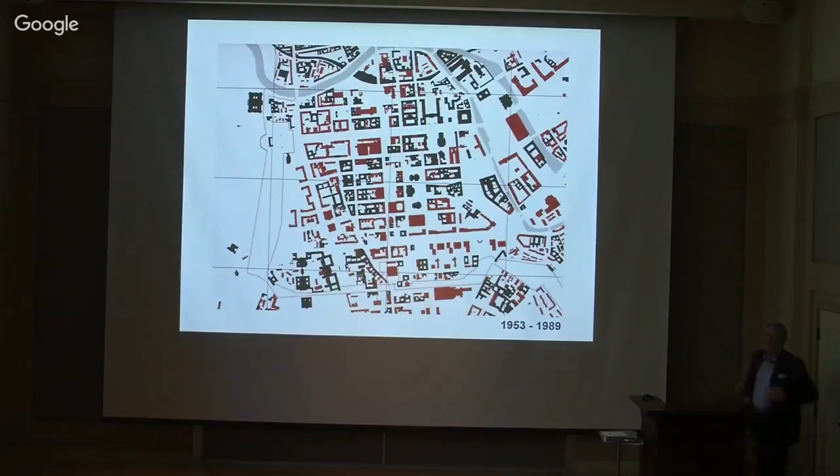Terrible story, terrible story. Here the Schloss existed, and now there is the Palast der Republik, as was mentioned before. And when you see this photo, you see there was a need to get back to the images, to the urban spaces which defined Berlin before 1940.

This is a nice drawing by my partner, Christoph Sattler, which shows the center we will occupy now in this lecture. Here's the Schloss with the cupola, done in the 19th century, opposite the Altes Museum by Karl Friedrich Schinkel, the Church, the Zeughaus — the building where the arms are collected, by the same architect as the Schloss, Andreas Schlüter — and here Unter den Linden, the big street running to the Brandenburger Tor, and here the Humboldt University, the two Humboldt brothers, very important figures of the early 19th century, both educated under the influence of Goethe.

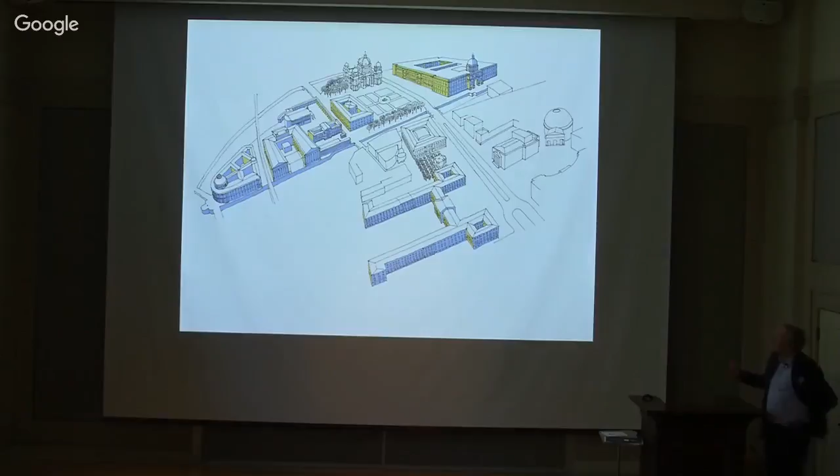The one, Alexander, traveled around the world, explored South America and Russia, did wonderful collections. The other, Wilhelm, founded this university. And here the so-called Museum Island is kind of the German Louvre.

This is a wonderful painting, 19th century, by Eduard Gaertner, who shows Unter den Linden, a classicistic building, the monument for Frederick the Great by Rauch, and this street runs to the facade of the Schloss with the cupola, which gave kind of a very Baroque view.

This is, you all know it, I saw it already in the office, the Altes Museum by Karl Friedrich Schinkel, facing the other side of the Schloss.

You know, these museums were all founded in the beginning of the 19th century when the German kings went to Paris two times, 1814 and 1815, after the siege of Napoleon, and they saw that Napoleon had turned the Louvre into a museum by Denon, the great collector, so people should occupy themselves with art instead of demanding democratic solutions. So King Friedrich Wilhelm III said, okay, let's build a museum - it keeps away the people from taking over my reign.

This is a photo showing the Schloss from the era of 1920. It's interesting, you see the Renaissance part here, and then the two courts and the cupola, which were done by Andreas Schlüter, who was a very prominent Baroque architect. He also lived in St. Petersburg, and he was not only an architect, he was also a sculptor, like the great Italian masters, Michelangelo, who did both disciplines, sculpting and architecture.

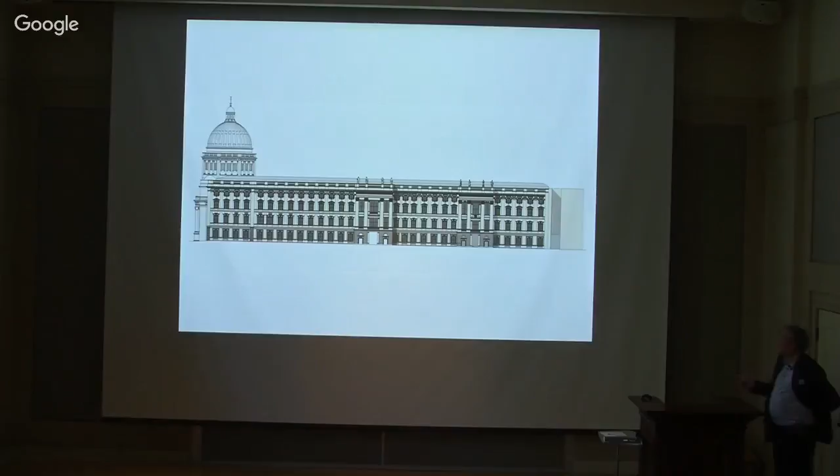These are the elevations, as I told you, which were given as exact facts to be filled in. And it's a huge thing, 210 meters in length and 110 in the other direction, so more than 2 hectares. It has about 400 of these windows.

This is the Renaissance part of the Schloss, which is not to be reconstructed. Instead, we have this modern facade by Franco Stella, facing east. And this facade created the most trouble.

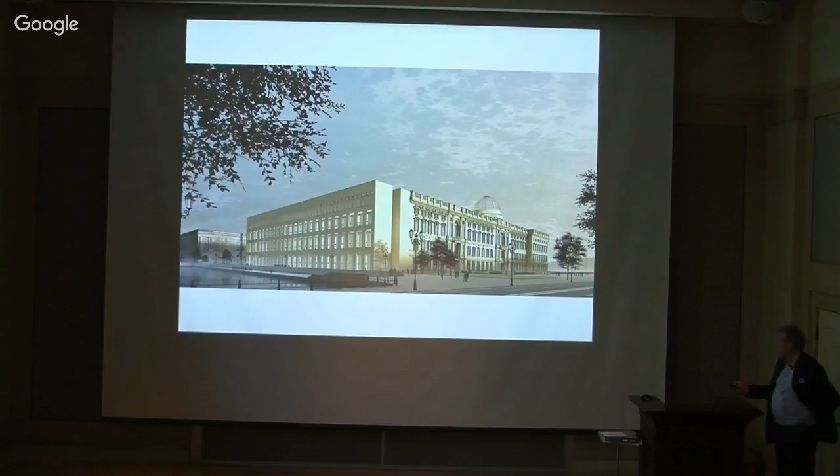So this facade, a photo I took a week ago, is now finished. It's a huge facade, 110 by 35 meters. It has a strong relation to the Altes Museum, which is over here, by Karl Friedrich Schinkel.

The thing with this modern language, the problem, or the wonderful task, of rebuilding this Schloss is that you have these given facades on the outside, defined to the millimeter, and you have to invent a new language for all the modern facades which are also there.

So we have this long facade which relates to the millimeter, to the height of the floors in this building, and which had in the beginning an internal staircase like the Altes Museum, which was later changed, later executed differently.

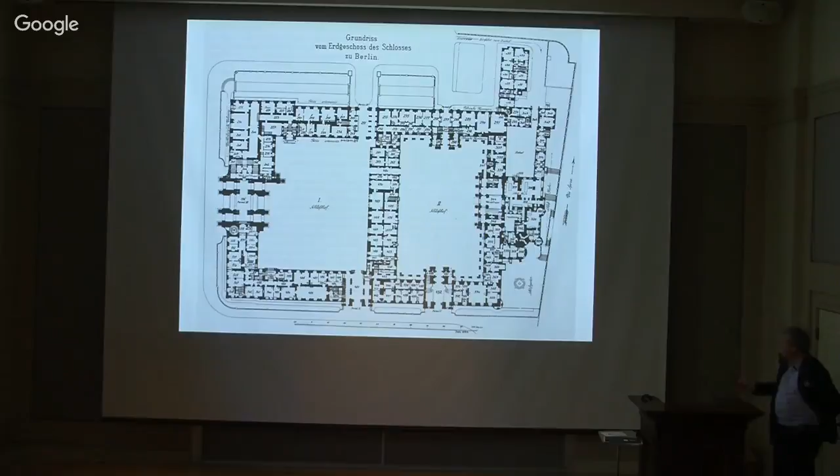And what Franco invented is that he said, I put this building in, so I have a nice corridor leading from portal number 2 to portal number 4. So this is very much a Baroque enfilade, and it resembles strongly the Uffizi in Florence.

Another thing I will tell you later is that it is possible to integrate altogether 42 rooms, which can be integrated later in the building in the next 50 years. It's a grand projet d'etat.

That means you can, for example, take this room and put it in later, which has been done in the Eremitage in Petersburg, in Tsarskoye Selo near Petersburg, in the residence in Munich or in Vienna or in Würzburg, which is a kind of convention. This is always important when you do such a project, to say it has been done before. So we don't have to prove that we can do it. We must say, let's drive to this place and see how it is done, then it works.

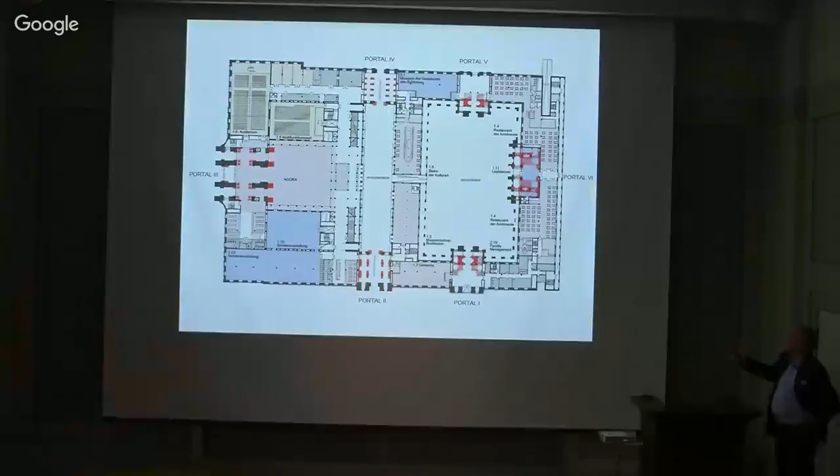So the next G8 summit will probably take place here. It will not take place in Schloss Elmau. It will take place here. Here are huge collections and what is necessary for a museum today: restaurants, cafes, bookshops, and I will show you later.

This is the reference Franco took for this north-south corridor, the Uffizi in Florence, and this is now the project of this so-called Schlossforum. That means this is the space between these new wings, which have modern facades done in concrete, with 8-meter high columns which are only 30 centimeters thick. And this is the inner part of portal number 4.

When we don't have the money, it's a plain plaster facade. If we have gained more money, we do what the Baroque kings did: you paint it, and paint costs nothing, or almost nothing. And if we have gained even more money, you do it in real stone. Fortunately, we are in this condition already, so all these sculptures are now in production, whereas these facades are already finished.

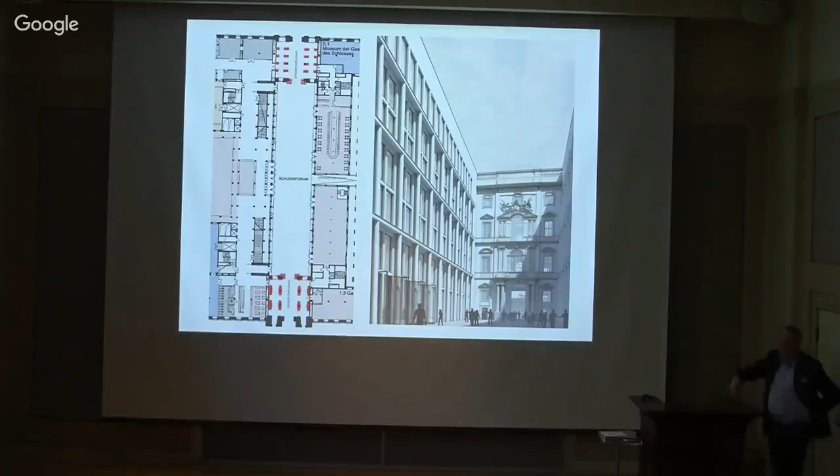What you also see here, and this is the wonderful thing about why you reconstruct historic buildings, the Altes Museum was exactly put in the axis between portal number 2 and portal number 4, so that when you walk through, you walk on the axis of this wonderful building by Karl Friedrich Schinkel. And as this Schloss is built exactly on the place where the old was, this effect comes up again.

This is now the Schloss Forum, how it looked last week. We are very proud of this very modern and very strong facade, which will then be glued together with this old facade, which is in production right now. This is from a few months ago, there was a public party, an open construction site, we call it, so people can go through and have a look what is going on.

This is the Agora. Here on the left side, you see the floor plan, which is looking to portal number 3. The inside of portal number 3 was a kind of Constantine arch, which is in Rome. You know, Baroque architecture takes parts like Lego and puts it in. I need a nice portal, I take it, I put it on the copy machine, I Xerox it and put it in. And this is what they did.

And this is a kind of huge public room, the entrance room, where you have these floors which are open to it. You can have ceremonies there. It's a public space of very high optical and political meaning.

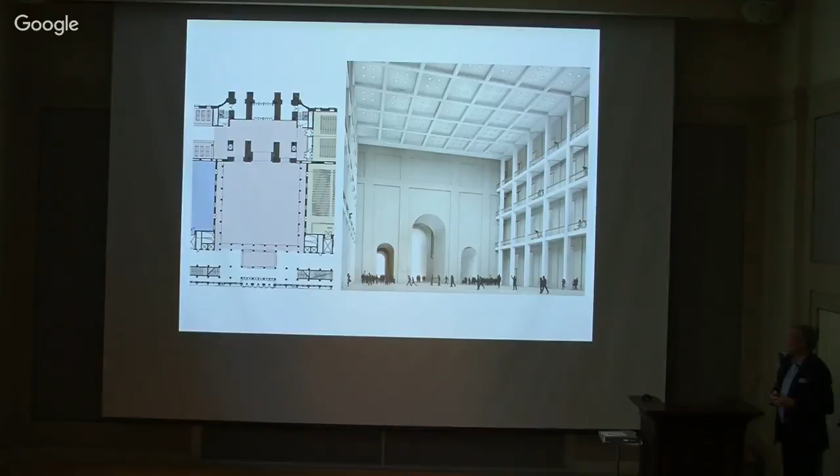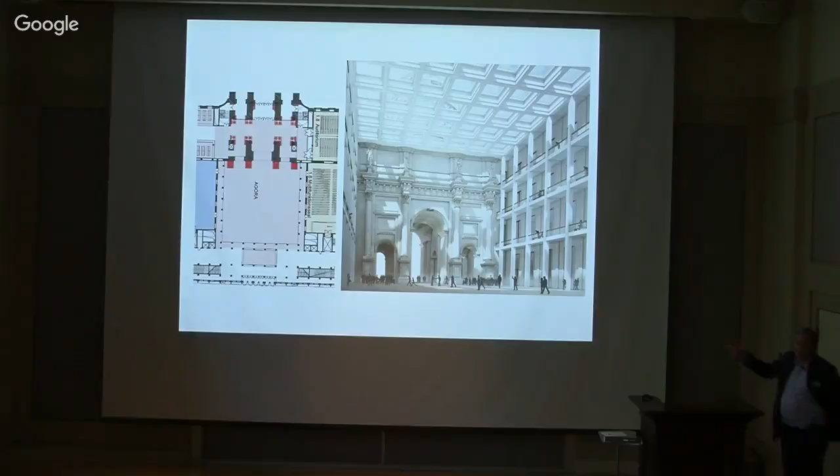The first grade, when we don't have the money, we paint the facade here, and then we build it. And this is under construction right now, but you can't see it because the scaffolding is sitting in front of it. But this is how it will look when it's finished.

So this is the inside of portal number 3, as I said, the Constantine arch from Rome. And this is the modern facade in concrete, which has almost the same coloring, which is already executed, already finished. So here's the huge entrance.

We expect at least 40,000 visitors per day, so it will be a real big hotspot of Berlin. And as I say, also a meeting place for the new G8 or G7 summit.

This is the other one. This is the Schlüterhof. As I said, a very nice part, a combination between sculpture and architecture. Andreas Schlüter personally designed 4 of these 6 sculptures in a new perspective, how it will look.

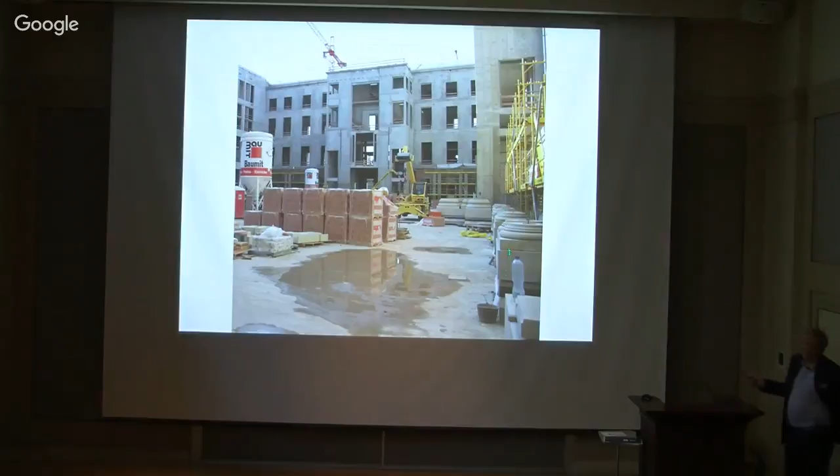And this is how it looked last week. It's a concrete construction, a heavy concrete construction. And here are really the massive sandstone bases of the columns. It looks like in old Greece.

So how is it built? This is the last part of my lecture, how these facades, how these wonderful sculptured facades are built. As I say, the first stage is that we have someone, Mr. Stuhlemmer, who for 10 years with his team was searching how the Schloss really looked.

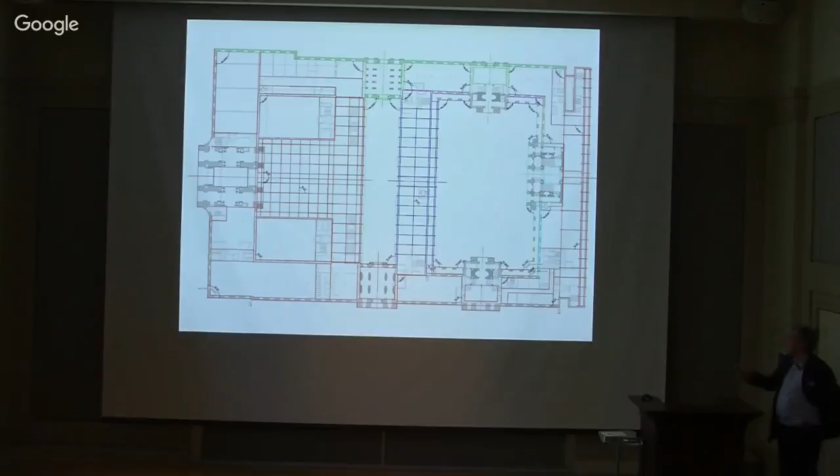So you know about Baroque architecture, there's never an angle of 90 degrees, it's always wrong. This makes it nice. And this is the plan which shows the grid system and shows the wrongness of the grid system. And all that was taken by us, like the axis, the different axes between the windows.

The next is that we have these special areas like this portal number 4, that this is the stage we build today, and this is how it can be built later, that we have resembling to that.

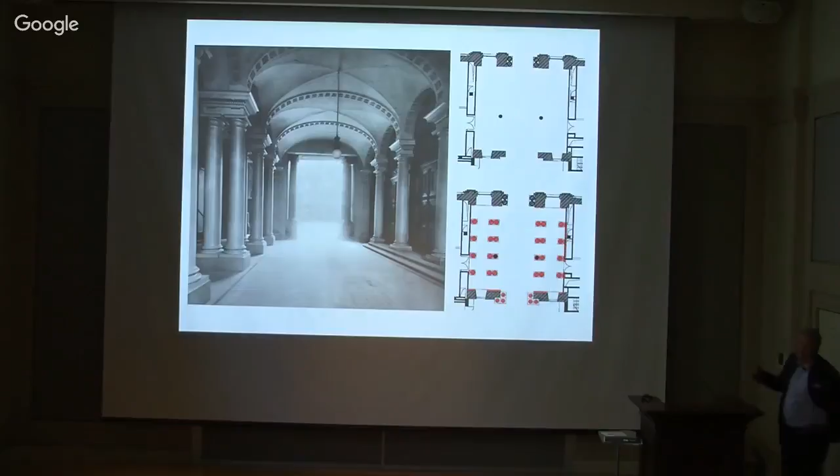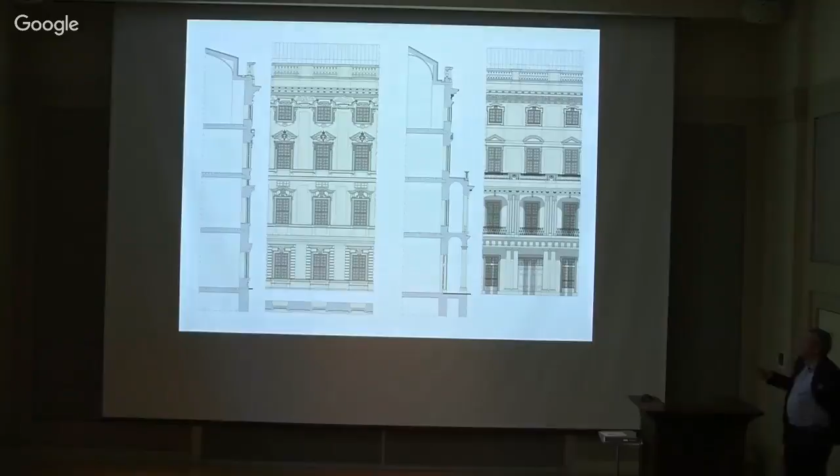And the next stage is that we made these very precise drawings of the facade. And before we started the whole thing, we made a full-size model in brick of one element. This alone cost a few million euros. And the construction is that we have a concrete building behind, and then we have 70 centimeters of massive brick. So the brick is carrying itself.

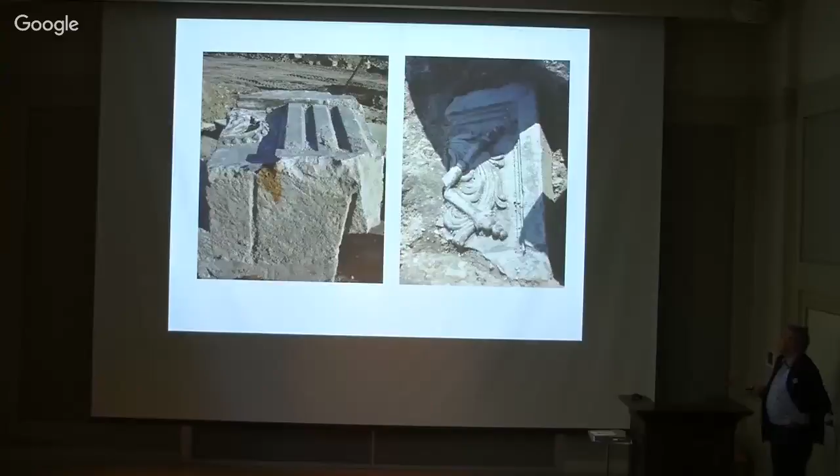It has no joints in the facade. This is a very important thing, so that we can have the old technique, brick and plaster, and in between altogether 17,000 parts of sandstone, which is produced just in time for every part of the wall.

This is a very nice thing, and I really know why I studied architecture. In the old times, when they did, for example, this Eckkartusche, this corner cartouche, they made a bozzetto, a model the size 1:10 in the beginning. Andreas Schlüter, we know, made a model scale 1:10. So this is a model scale 1:10 for the corner.

This is one of the sculptures, and this is the director of the sculpture museum judging how we should do it. After we have approved the 1:10 model, we do the next model in the size 1:3. So we enlarge it and change it a little bit. You see here, this is all done in clay, and here's a photo of the old Eckkartusche.

After that, we built a model in the size 1:1. This is the full-size model. In this model, we also take the division into stones. The firm has to know which stones to produce. And after this is done in clay.

Clay is moving, clay is shrinking. You make a model, you make a negative, and then again a positive. So this is the positive of the 1:1. There was before a 1:1 in clay, and you see it, it's very costly.

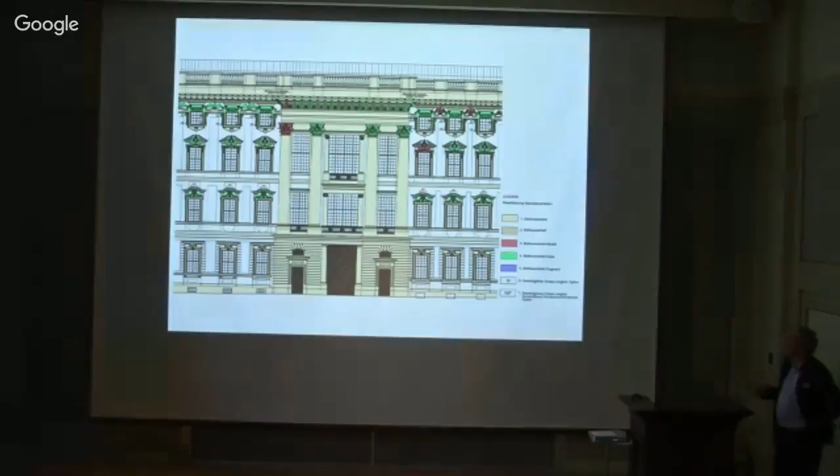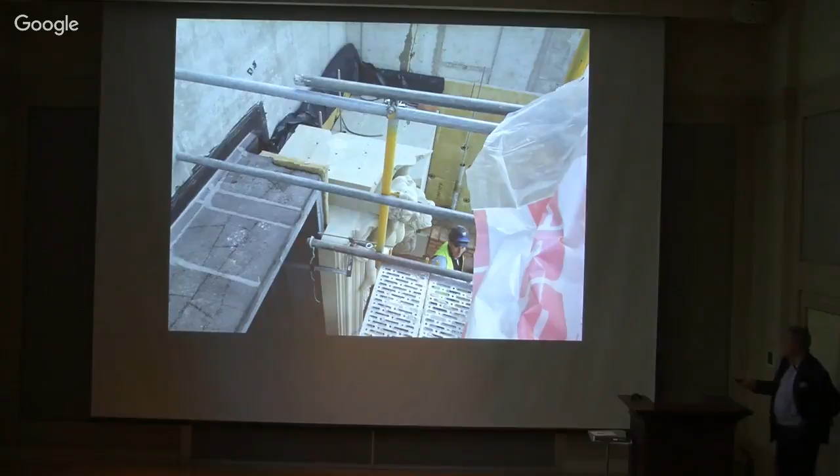Outside we built this 70 centimeter brick wall, and they put in these 17,000 limestone parts just in time. Very interesting work - it looks like the paintings of Karl Friedrich Schinkel, how they built in old Greek times.

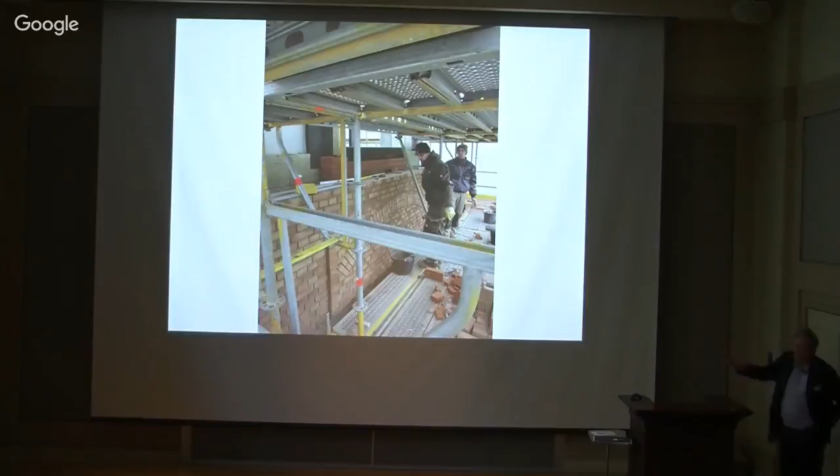When you are on the construction site, you feel like in these times. They have machines, cranes to lift the stuff, but the working itself is very much handicraft. This is in the Schlüterhof, where they also have a vaulted part which sits on limestone.

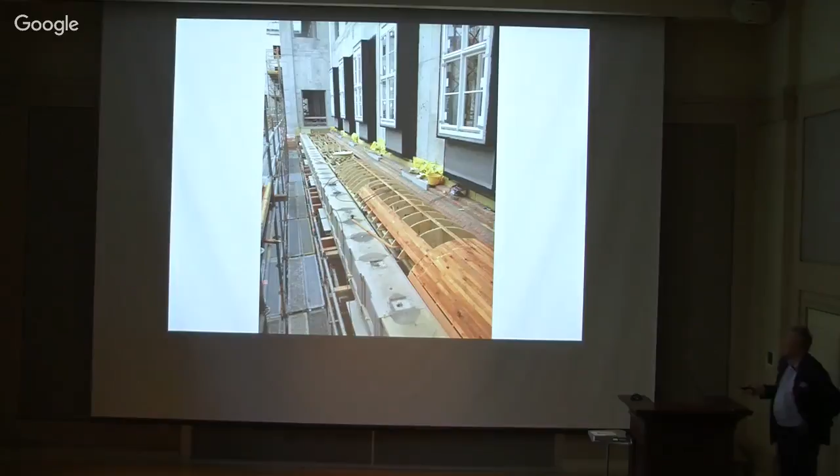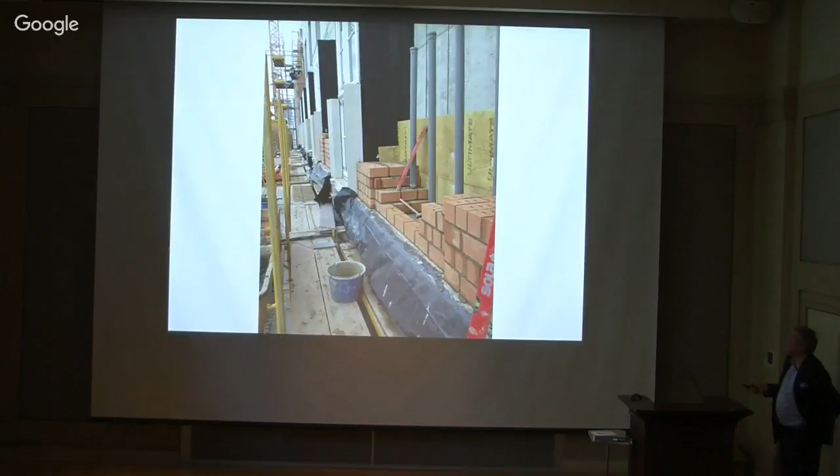Very complicated constructions. We worked 8 years on the planning alone, and here are tubes for some electricity, I don't know what that is, but in the end, this is how it looks, and it will stay like this for 2 years before it gets plaster on. When you see it, after so much work, you feel real relaxation.

This is inside of portal number 2. A few days we had no scaffolding, now again there's scaffolding to construct the rest of the building.

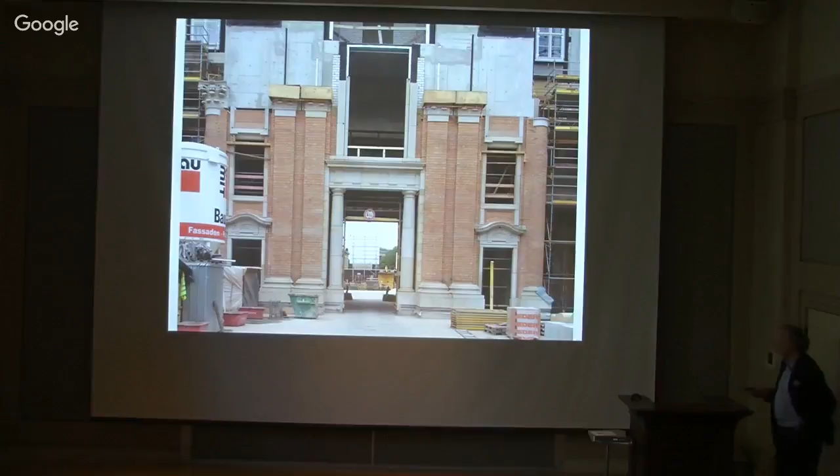What is inside? We spoke about the facades. Inside are huge collections, the collection which Alexander von Humboldt brought to Berlin, and it is a very intelligent solution that the final content will be decided in 2016.

We started the project in 2008. It took us 8 years to come to here. The opening will be in 3 years, 2019. And as museums, especially anthropological museums, change their way of exhibiting things, it was said the final design for the

interior has to be very much fitting to what other museums showed, so next week we get a final presentation from the new directors, which will show us what inside will be shown.

We have gained Neil MacGregor from London, who was for 15 years director of the British Museum, who's now working for us, and a guy from Holland, from Amsterdam, so that we have really an international team for museums.

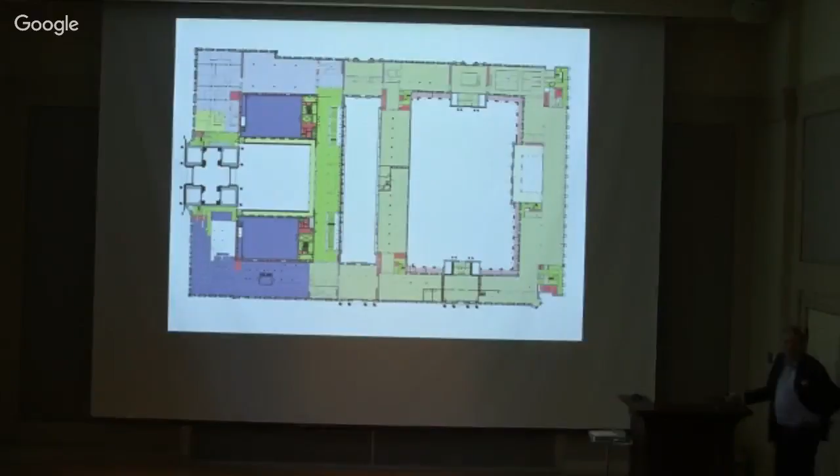Because, as I say, this is the new middle of the center of Berlin. It is kind of the new middle and the identification point for Germany. We really have to have a high level of what is inside.

These are some pre-plannings. These are boats which come from the Pacific. These are parts of the museum which will be integrated there. And as you see, this is an original part, and this is a kind of copy. Nowadays, kids are allowed to climb on the copy.

But you also see that the inner part of the museum has nothing to do with the outer part. The inner part is just plain empty space, what museum people like. This is another part, one of the first ideas, but the final ideas we will get next week.

Well, I finish with two photos of historical rooms. As I say, the Schloss, the rebuilding of the Schloss, the new function of the Schloss is not a singular thing. The first Schloss which had to be given a new content was the Louvre. As you know, Louis XVI was guillotined, and Napoleon made it into a museum.

And it is changed every 20 years. With the Louvre we have the imagination that it looked like it looks today. That's not true. The same happened to the Hofburg in Wien, to the Winterpalast Hermitage in Leningrad, Petersburg, and also in Vienna.

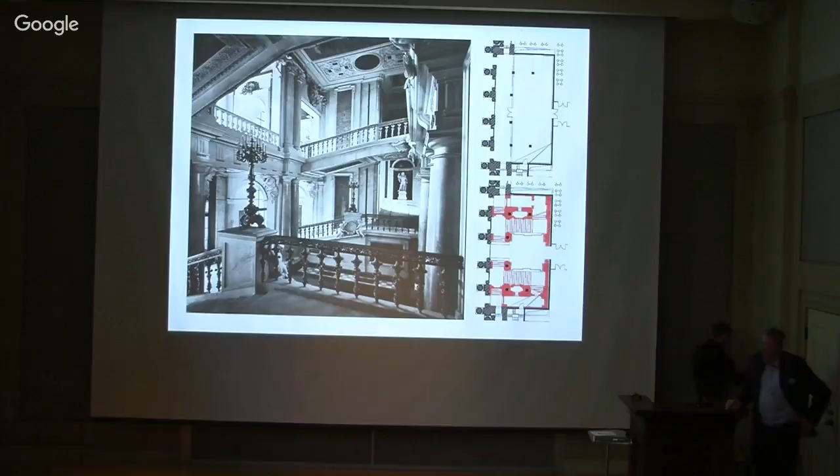Are there any questions, please?

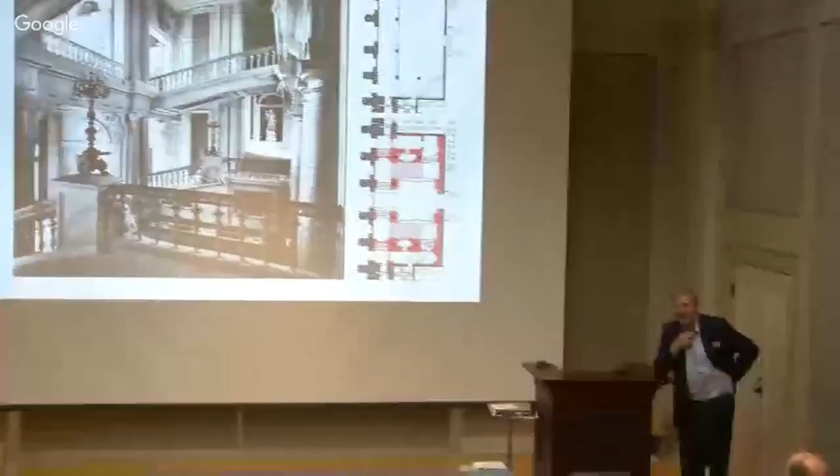First, my name is Joseph, member of the faculty here, and I think it's an amazing thing, because up to now we have seen the history of architecture dismantling architecture and giving us just the raw bits. Now it's amazing, because you're starting with the raw bits and giving back architecture. My question is, how many jobs are you creating? This is an amazing project for a state to take on, because you're probably giving a lot of work for the economy and creating a lot of jobs.

Yeah, that's a very good aspect. I think the going on of this project always packs two other projects. Like I showed you the new Palazzo Barberini in Potsdam - this idea of reconstructing a palazzo in a not so important city like Potsdam was evoked by the idea of reconstructing the Schloss. And this will not be the last project coming out of this thinking. We are also doing the Garnisonkirche in Potsdam, which is 90 meters high, a €100 million project, a huge thing. I think people will shift their vision of architecture, their relation to precious urban space in the middle of a city.